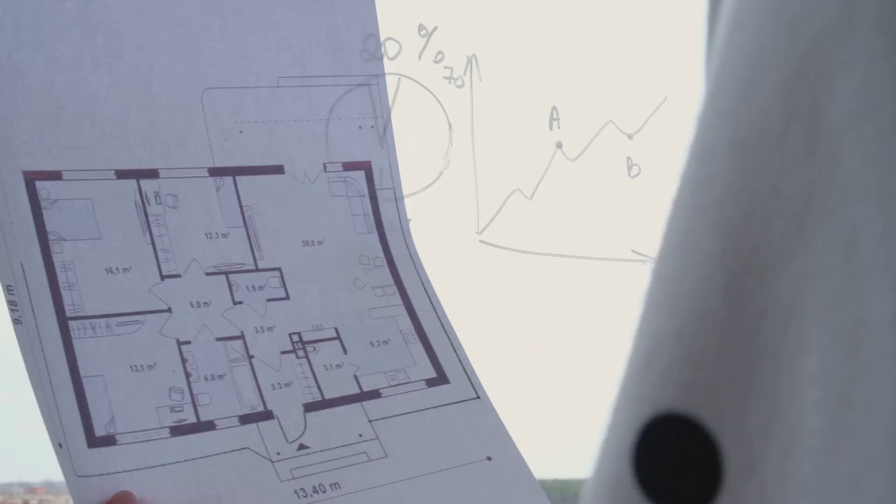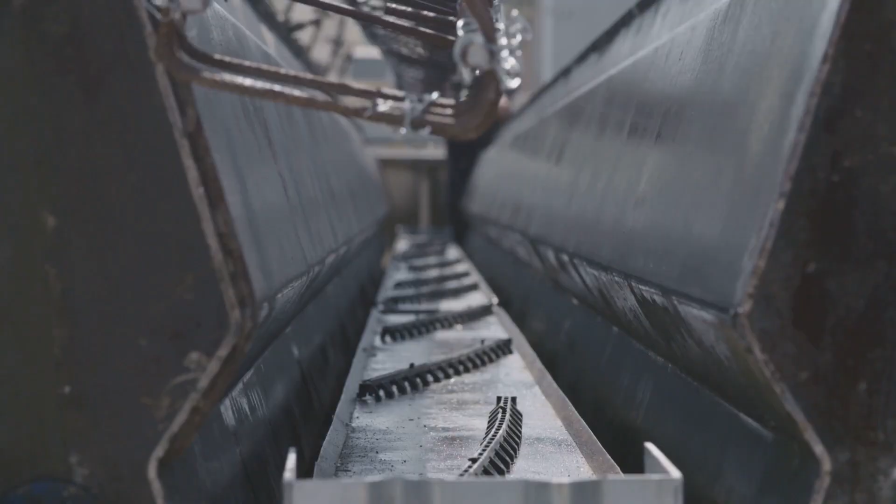Before the Hyatt walkway collapsed, the danger was already on paper. Not in a way most people would notice, not with a giant red warning label, not with a drawing that said, "This detail needs another look before anyone stands under it." The plans looked like plans, the steel looked like steel, the atrium looked beautiful, and the people walking into that hotel in Kansas City had every reason to believe the building around them was safe.

That is what makes structural failures so difficult to talk about. Because from the outside, everything can look finished. The lights are on, the glass is clean, the walkways are open, the space feels impressive. But hidden inside the details, one change can alter how force moves through a structure. One connection can carry more load than someone realized.

One assumption can travel from a drawing to a shop detail to the field. And if no one catches it in time, the mistake does not stay on paper. It becomes physical. Steel bends, connections fail, gravity collects the bill. That is the room we're opening today.

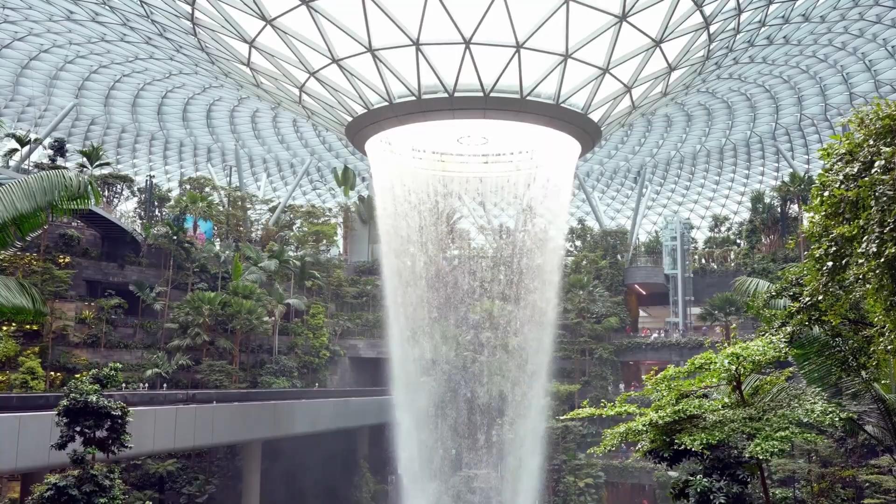The Hyatt Regency walkway collapse was one of the most devastating structural failures in American history. In 1981, suspended walkways inside the Hyatt Regency Hotel in Kansas City collapsed into the atrium below, killing 114 people and injuring more than 200. This video is not about replaying tragedy for shock value. It is about learning from it.

Because the Hyatt disaster teaches a lesson that still matters now, maybe more than ever, as artificial intelligence moves into construction, design review, document control, and engineering workflows. The question is not, would AI have magically prevented the Hyatt collapse? That would be too easy, and honestly, too arrogant.

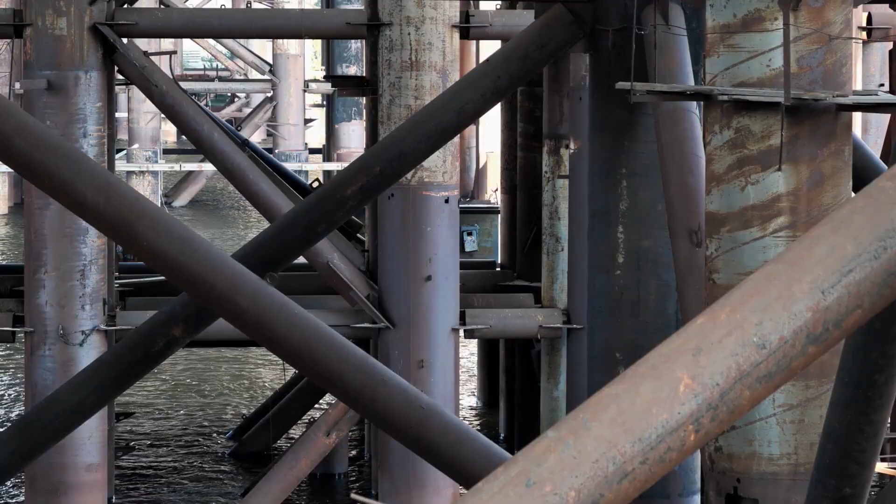The better question is this: could AI have helped force the right question sooner? And if it could, what would still require qualified human judgment? Because that is where the real lesson lives. The Hyatt walkways were suspended inside a large hotel atrium. The issue investigators focused on involved the box beam and hanger rod connections that supported the walkways.

The original concept and the final built detail were not the same in a very important way. The change may sound small if you are not used to structural drawings, but in construction, small changes are not always small. A detail can look similar and behave very differently. A connection can look reasonable and still carry load in a way that was never fully checked. That is what makes this case so important.

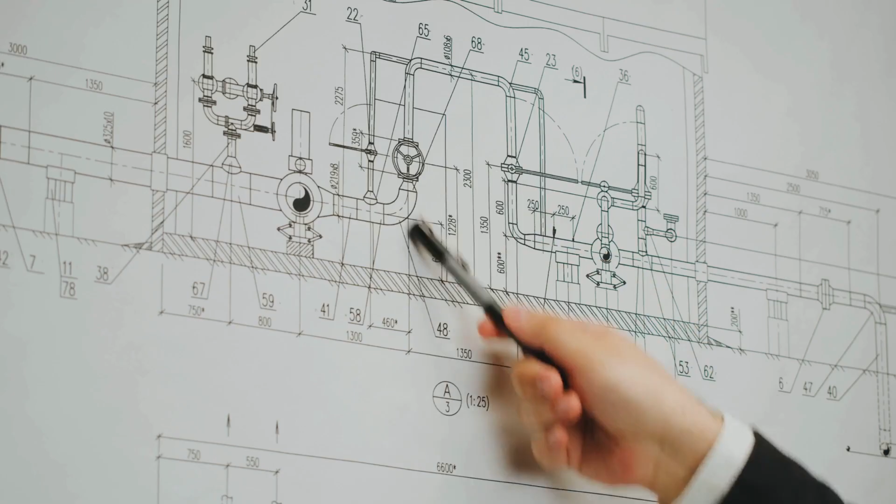The failure was not simply that someone forgot steel needs to be strong. The deeper issue was review, communication, responsibility, and understanding what a design change actually did to the load path. That phrase matters. Load path. A structure needs a path for force to travel safely. The weight has to go somewhere.

People standing on a walkway create load. The walkway transfers that load to beams. The beams transfer it to rods, connections, columns, or supports. Every part of that chain matters. If one connection is weaker than the demand placed on it, the whole system can become vulnerable.

And if a design change doubles the demand on a connection, or changes how that demand is carried, someone has to recognize that. Someone has to ask, what changed? Who checked it? What load is this connection carrying now? Does the detail still work? Was this reviewed by the engineer responsible for the design? Those are not small questions.

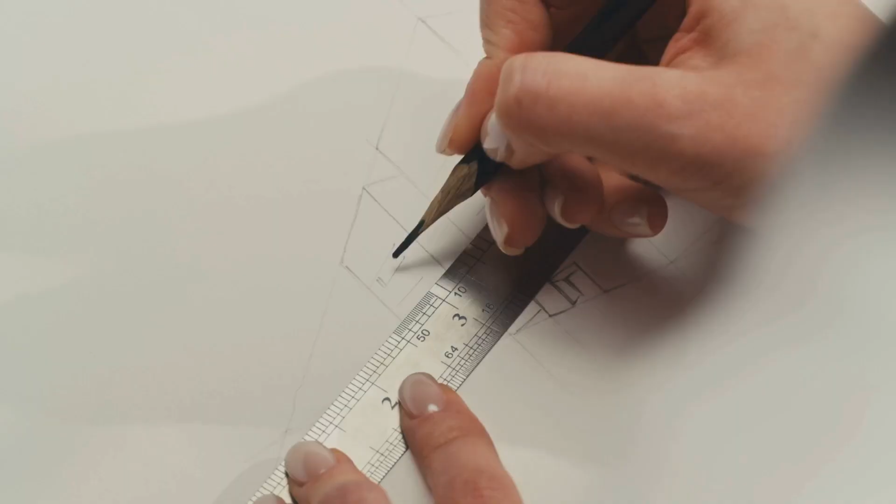Those are safety questions. Now imagine that same situation in today's world with modern software, BIM models, digital drawings, automated checking tools, and AI-assisted review. Could AI help? Possibly yes. AI might compare an original design concept with a revised shop drawing and flag that the support arrangement changed. It might notice that a connection detail is now carrying a different load than expected.

It might scan drawings, notes, calculations, and revisions and say, this detail needs engineering review. It might help catch the gap between what was intended, what was drawn, and what was built. That could be incredibly valuable. Because many disasters do not begin with one person saying, gosh, let's ignore safety.

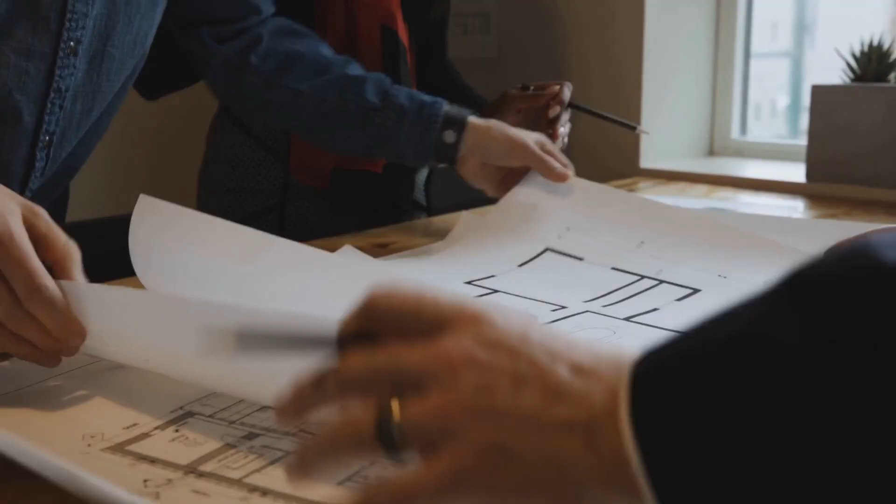They begin in confusion, in assumptions, in rushed communication, in unclear responsibility, in drawings that change, in details that move forward without everyone fully understanding the consequence. AI could help surface those gaps. It could act like a second set of eyes, not a licensed engineer, not the final authority, but a system that says, something changed here. Are you sure this was checked?

And sometimes that one question can matter. Because the most important warning is not always a dramatic alarm. Sometimes the most important warning is a quiet prompt that forces the team to slow down. Look again. Verify. Ask who owns the answer. That is where AI could become useful in construction safety, not by replacing professionals, by helping professionals catch what busy people miss.

Think about how many documents move through a construction project: drawings, specifications, addenda, shop drawings, submittals, RFIs, meeting minutes, emails, field reports, inspection notes, change orders, revisions. Now think about how many hands those documents pass through: architects, engineers, contractors, fabricators, subcontractors, inspectors, owners, project managers, superintendents. Everyone is looking at something, but not always the same thing, and not always with the same responsibility. That is where gaps can form.

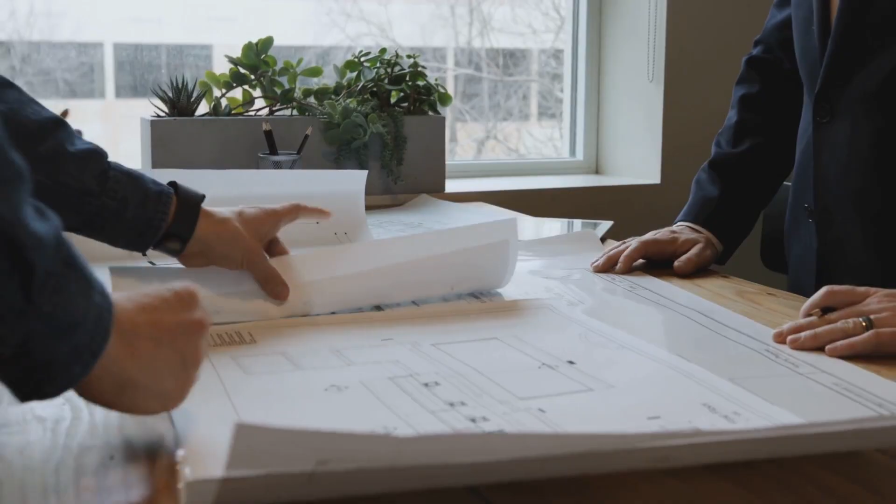AI may be useful because it can compare information across documents quickly. It can help identify change details. It can summarize what shifted between revisions. It can point to missing review steps. It can help find conflicts between drawings and specifications. It can help organize the questions that need human answers.

That is the good version of AI in construction. It helps qualified people see, sort, and manage information faster. But here is the line we cannot cross. AI can flag a problem. It cannot carry responsibility for the building. AI can ask, "Was this connection reviewed?" It cannot replace the engineer who understands whether the connection works.

AI can compare documents. It cannot fully understand every field condition, every assumption, every code requirement, and every consequence unless the right people provide the right context and verify the output. That is the Build Smarter line. Use AI where it helps. Do not let it quietly become the person in charge, because AI has its own risk. It can be wrong in a way that looks right.

And if you watched our recent video about AI drafting plans, that idea should sound familiar. A polished output can be dangerous because it feels trustworthy. The table lines up. The note sounds professional. The calculation looks clean. The summary feels confident. But confident is not the same as correct. And in construction, looks right is not good enough.

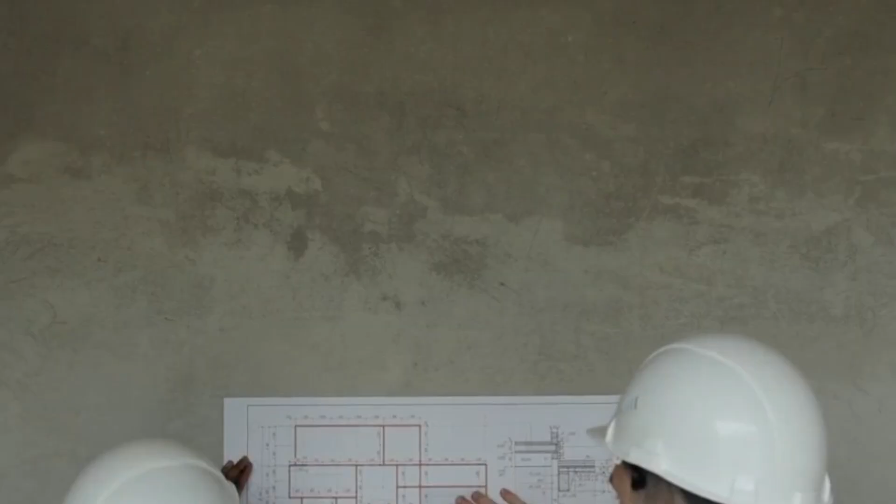That is why the future should not be AI replaces engineering judgment. The future should be verified AI. AI with guardrails, AI with review, AI that supports licensed professionals, AI that helps teams see changes earlier, AI that helps project managers track open questions, AI that helps engineers compare revisions, AI that helps contractors avoid building from misunderstood information, AI that helps owners understand where risk is hiding. Not AI as the hero, AI as the flashlight.

Because when you open the hood on a structural failure, what you often find is not one dramatic villain. You find a chain: a changed detail, a missed review, an assumption, a communication gap, a responsibility gap, a question that should have been asked sooner. That is why this case still matters. The Hyatt walkway collapse reminds us that buildings are not just designed once. They are designed, revised, reviewed, fabricated, built, inspected, and trusted. Every step matters. And if AI can help catch a dangerous gap before it moves from paper to steel, that is worth paying attention to.

But we should not oversell it. AI would not have been magic. It would not have replaced the need for engineering responsibility. It would not have erased the need for clear communication. It would not have changed the fact that somebody qualified had to understand the load path and approve the detail. So the honest answer is this: AI might have helped force the right questions sooner, but it still would have taken qualified humans to understand the answer and act on it.